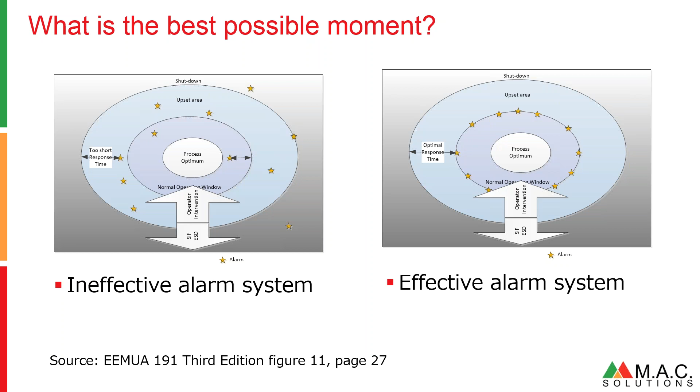So they provide on the same page, in the same figure, the effective alarm system, where all the yellow stars, the alarms, are nicely arranged on the boundary between the normal operating window and the upset area. It looks easy on the picture, but the reality is different.

So let's first take a look at what we can find in the alarm and event logs of the alarm's life cycle. You can probably find an alarm that is annunciated in the alarm and event log. You can probably find the time or the event of the operator acknowledging the alarm, and you can probably find the event where the alarm gets cleared. Typically, there is no trace of operator response in the operator log.

There are some problems with timing. This is what this webinar is about. You can find in the alarm and event log these things: alarms that get annunciated and get cleared. They might be too early or too late. The system has cleared the alarm, probably without any operator action, or it might be that the alarm is fleeting.

Then you have this sequence. The alarm gets annunciated, gets cleared, and gets acknowledged after the clear. What happened? Was the operator busy with something else? Did he perform any action or not? We don't know. Is it a way to make the alarm disappear from the alarm display? This acknowledge thing depends on how your alarm system is organized.

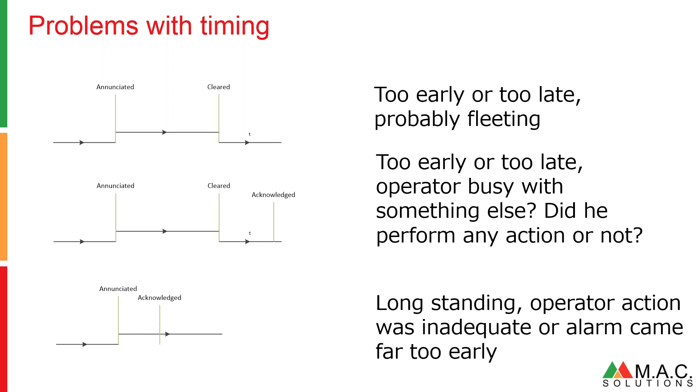And then you can find these alarms that get annunciated, get acknowledged, and have no clear. Typically they are called long-standing alarms. The operator action was either inadequate, or the alarm came far too early, or we don't know. The thing might be a defect. Let's try to fix these problems first.

An alarm and event reporting tool such as the one from Mac Solutions, ProcessVue Analyzer, can guide you in this matter. You can see here in this diagram that about 62% of the alarms are displayed or annunciated less than 12 seconds. You can ask yourself, what can an operator do in less than 12 seconds? Not much, really.

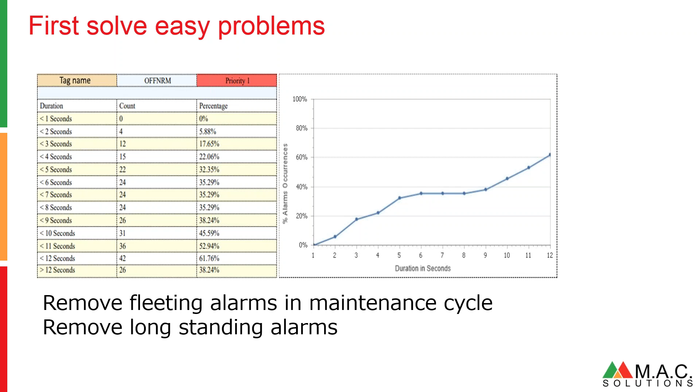So, anyway, these fleeting alarms or alarms with a very short life cycle, they are distractive. And you also need to investigate whether it's an obligation to acknowledge the alarm. In principle, acknowledging means taking responsibility to deal with the alarm, which brings us to the next slide.

Next, you have the operator response delay. The operator should understand what the alarm means. He should think about what to do and not jump to conclusions. We'll have another white paper on that specific subject. He needs to collect all the required information about the situation. He needs to find the right procedure to follow. And he needs to start taking actions or have somebody instructed to perform actions, as to go into the plant and do manual actions.

Then you have the process dead time. The process dead time is the time the process needs before any effect of the operator action becomes imminent. During this time, the operator should be focused to observe the process responding to his actions, no distractions wanted. Then up here, you have the process response to the operator action. The operator still needs to monitor the process variable moving towards the clear line.

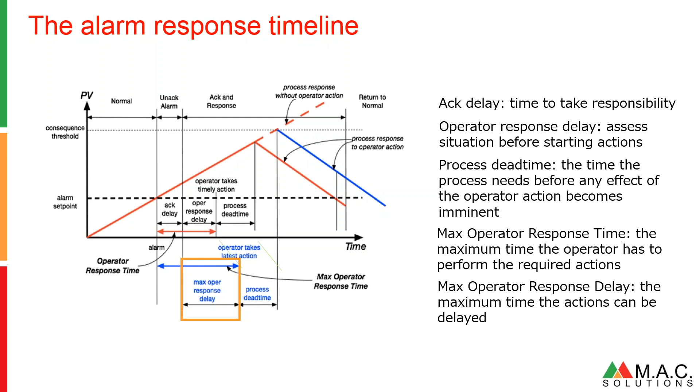I would call it allowable time, the time the operator can wait to acknowledge, for example, because he is away from his desk or he's performing other tasks, such as dealing with another alarm. So, the maximum operator response time is the time between the alarm is annunciated and the consequence threshold minus the process dead time. Mind you that the consequence threshold is very often set by the safety guys, and if it's not set by the safety guys, it's something to be considered during rationalization.

So this maximum operator response time is typically discussed during alarm rationalization based on a number of estimations. Questions to be asked are, can the operator perform all the required actions from his console or desk? Or does somebody need to go into the plant and perform the manual operations? And if that's the case, how big is the distance to get to the right place in the plant to perform these operations? These are all taking time.

The other thing to be taken into consideration is the operator response delay. Can an operator immediately acknowledge the alarm, saying, I'm going to deal with it, or is he still performing another task, just like dealing with another alarm? And another question to be asked, and that's something I'll come back to in one of the next slides, is the operator allowed to be away from his console or his desk?

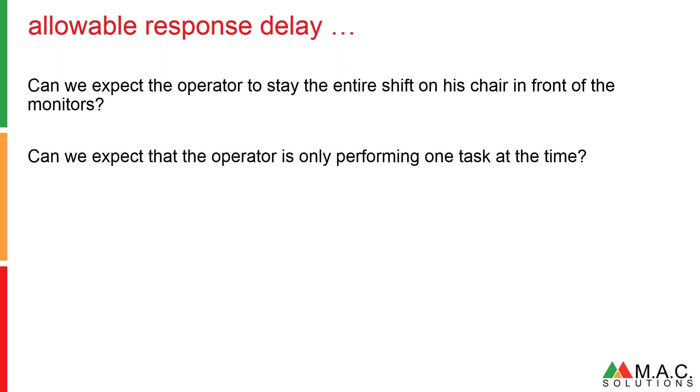So we discussed allowable response delay. We need to take the following into consideration. Can we expect the operator to stay the entire shift on the chair in front of the monitors? I don't think so. Can we expect that the operator is only performing one task at a time? I don't think so either. How are you going to manage this? This is not an engineering issue. This is an organizational issue.

So, taking the previous rule, you can argue that the acknowledge delay plus the maximum operator response delay should be smaller than the time the consequence threshold is reached, minus the process dead time, minus the time required to perform the actions. I would say the acknowledge delay plus the operator response delay is the allowable response delay.

Let's take some examples. Let's say we allow the operator to deal with another task during 10 minutes, or we allow the operator to be away from his desk for 10 minutes, or we have estimated that whatever he's doing might take another 10 minutes before he can adequately take responsibility to deal with the alarm. If you allow that, then this has an impact on your alarm system. Because any possible alarm which requires an operator response in less than 10 minutes should be avoided. Or the operator action should be automated.

Meaning that if you find in rationalization such an alarm where the operator response delay is less than 10 minutes, you have to look into, well, when you automate the operator action, then you can decommission or downgrade the alarm to something else. And don't forget to document why you have done this. The other option is to establish a new alarm with enough response time.

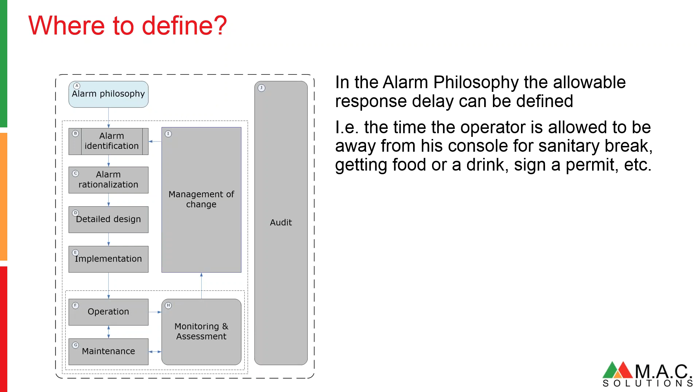It's also the time the operator has available to finish or complete another task before responding to the alarm. They should be aware of that. We'll come back to this later. It's also an organizational matter. Basically, if you set up your alarm system in the right way, then you will ask your operator to only acknowledge the alarm when he's capable of starting to assess the situation and perform the required actions. Right?

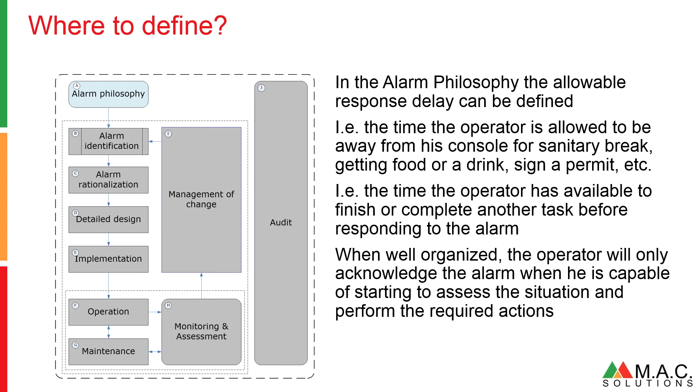This has some consequences. I think nice buttons like a page acknowledge and so on should be avoided. Also, it should be avoided that people just acknowledge the alarms and do nothing. Like I said, it's an organizational issue, and plant management and human resources should be aware of it because it can come up in discussions.

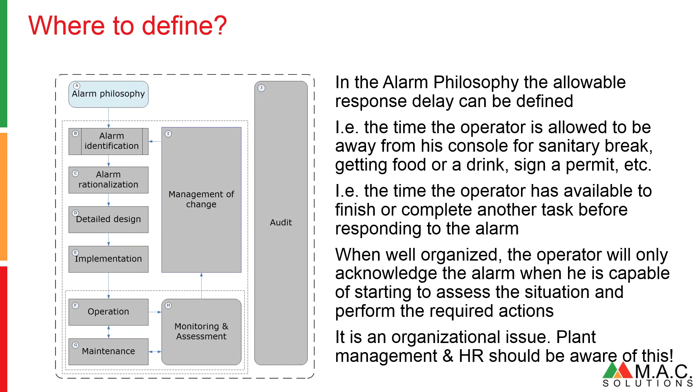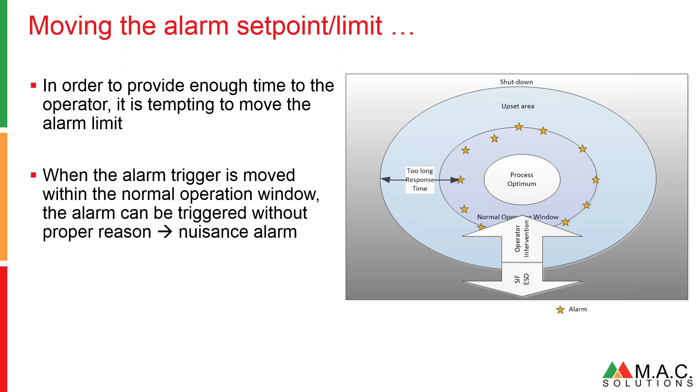So we want to allow the operator more time to respond to an alarm. So it's very tempting to move the alarm limit, right? So if you start moving the alarm limit, like illustrated in this figure, then there is a chance that you move the alarm threshold into the normal operating window. If you have your alarm limit in the normal operating window, the alarm can be triggered without a proper reason and becomes a nuisance alarm, and then we need to get rid of that.

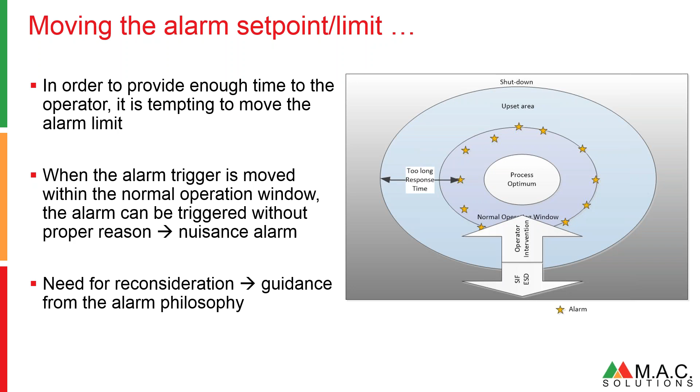So if you need more time and you want to avoid that it's a nuisance alarm, you need to reconsider your alarm limit. And you will probably find some guidance from your alarm philosophy. If there is no guidance, the alarm philosophy should be reviewed.

So what is a potential method to set the alarm threshold at the right place? You have to define the consequence threshold if that is not already defined for you by the safety guys, by the quality guys, or by the authorities. To avoid spills and releases of dangerous substances.

Knowledgeable people in operations should estimate the time required to perform the actions. You should estimate or measure the process dead time for that particular situation. And then on top of that, you add the allowable response delay, and then you see where you have to put the alarm threshold.

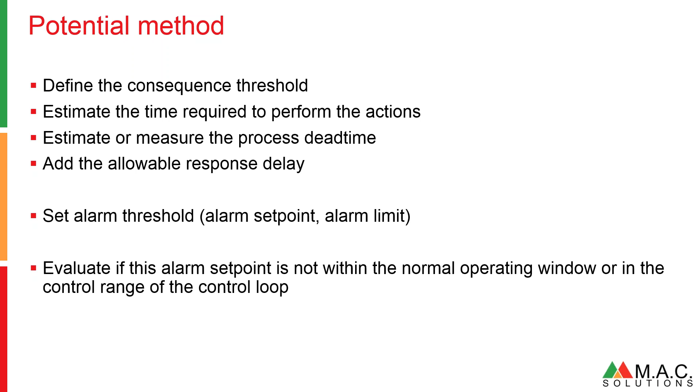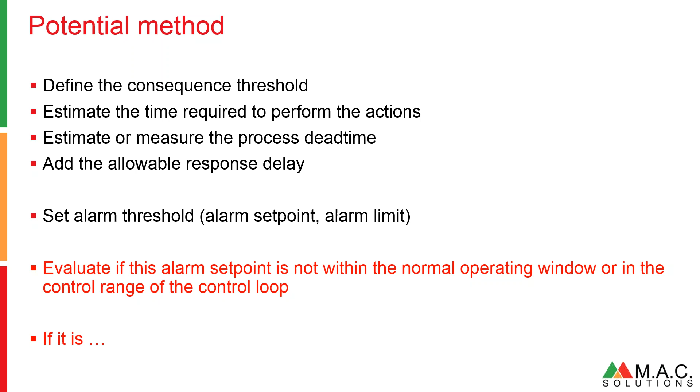The next thing you need to do during rationalization is to evaluate if this alarm set point, alarm threshold, is not within the normal operating window or in the control range of the control loop. And if it is, then it's time to apply advanced logic. So advanced logic is needed when an alarm limit on a single measured value, a single process value alone, cannot provide enough time to respond to the alarm.

What can you do? You can combine, for instance, other parameters from the same process variable from the same control loop, like the rate of change or the direction of change. You can combine process and equipment conditions, such as are we in startup or shutdown, are we heating or cooling. These conditions are also used to suppress alarms during certain states. You can also use them just to annunciate the alarm in particular states because you know that this is not the normal operating window.

You could also combine with this alarm set point the configuration and status of the control loop. Is the control loop in manual? Is it automatic? Is it cascade? Is it advanced control? What have you. And for batch processes, you can also take into account the recipe state.

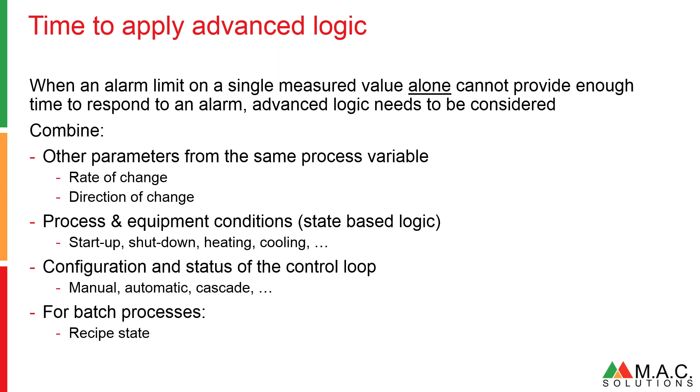More advanced logic. If a single process value and the parameters of that control loop are not capable of indicating the abnormal situation you want the operator to avoid, then you might need to combine different process variables. So what can you do?

You can investigate the alarm and event log for sequence of events leading up to the abnormal situation. This is like a manual search in the alarm and event log. Some tools, like the reporting tool from ProcessVue, can help you in such a search. You could use pattern mining techniques to find such sequences.

You can apply data mining techniques to the process historian to predict the abnormal situation and/or to find the right contributing variables to that abnormal situation you want to avoid. Note that in such a case you should have such an abnormal situation in your alarm historian.

Another thing you can do is to use your simulation model of your plant, which you might use for operator training purposes, and have that run a little bit ahead in time. For instance, you start it every 15 minutes or every 10 minutes and you let it run 30 minutes ahead in time. So if then that simulation hits one of the alarm thresholds, you can say, okay, I have something now that is predicted, and so we have more time to respond.

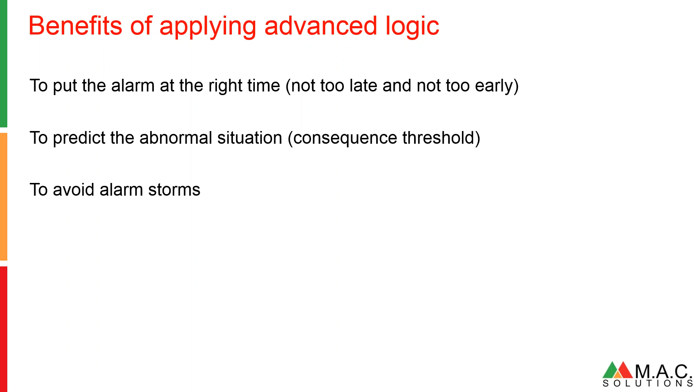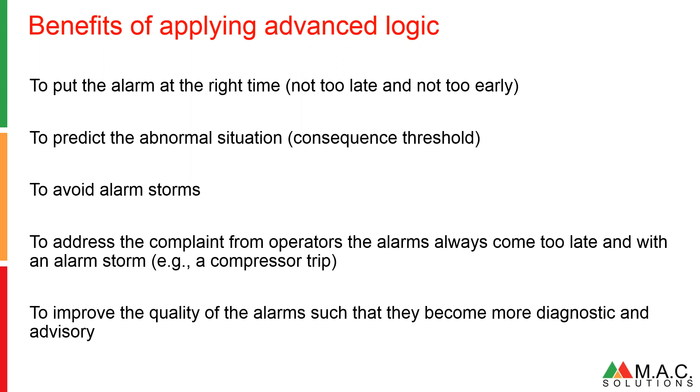If you can avoid that abnormal situation, if you can avoid a trip, like a compressor trip, you also avoid alarm storms. And you address the complaint from the operators that the alarms always come too late, and they come with an alarm storm. Compressor has tripped, and then you get a bunch of other alarms as a result of that trip. And the side effect is that you improve the quality of the alarms such that they become more diagnostic and advisory.

Now, if you want to implement this, the IEC 62682 standard suggests that you shall train the operator. It's an obligation. So first of all, you need to train the operators to understand the alarm philosophy if you have put the concept of allowable time and advanced logic in your alarm philosophy. You should train the operators to understand any advanced logic when it is applied. And the operators should understand that such logic is to their benefit.

It is suggested by EEMUA 191 that such logic should be presented in a graphical way and not in programming code of any kind, in order that the operator understands the logic that is applied to generate the alarm. Eventually, if your HMI allows it, you should make perhaps a help function in your alarm such that the operator can view the logic that has triggered the alarm. But that's a general recommendation. That's a bit outside the scope of this webinar.

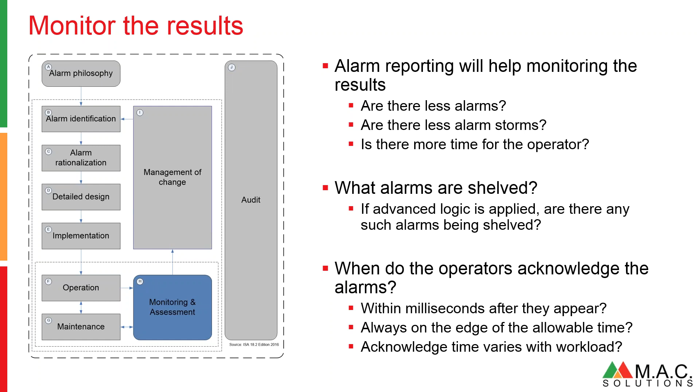So, next to monitoring and assessing with a tool, which is something you can run in the background and report automatically every week, every 2 weeks or every month, there is, as proposed by the standards, the audit process. The audit process verifies the perception of the operator. So the audit process must include operator interviews, and one of the questions to be asked is, are the alarms now coming on time? To the perception of the operators, are they on time or are they not on time?

Is the applied logic working or is it becoming a nuisance? Do you have enough allowable time? It might be that you start off with an allowable time away from your desk of 5 minutes, and the operators say, okay, that's an enormous improvement, but they are assigned other tasks to do, and they say, well, we don't have enough time anymore, so we need more allowable time.

In that case, you need to update the alarm philosophy, and you can say, okay, we're going to introduce more or less allowable time, or we're going to allow more or less advanced logic in our design of our alarms.

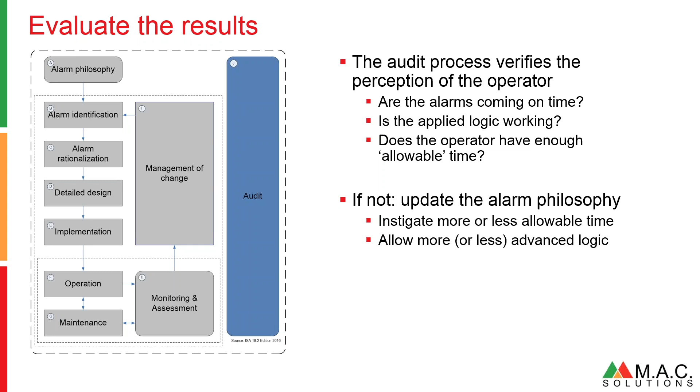This brings me to conclusions. The alarm philosophy is the place to define the allowable operator response delay, or the maximum ack delay, depending on how you call it in your alarm philosophy. Good timing requires a consensus in the alarm philosophy on an acknowledgement strategy. Think about: acknowledge only if you as an operator are going to do something about the situation being alarmed; no longer acknowledge after the alarm is cleared, removing the page acknowledge button from the alarm display.

Good timing requires also consensus in the alarm philosophy to apply advanced logic or not. Good timing requires a rationalization process which provides figures or estimates in process dead time, and a rationalization process which discusses and estimates the time to perform the actions and to assess the alarm situation. Good timing requires a design process that is capable of testing and validating the advanced logic, and an implementation process that includes the operators and trains the operators in this new way of predictive alarming.

Good timing requires a monitoring and assessment process and tools that are capable of measuring the acknowledgements and the clear times. Mind you, most of the alarm logs do not contain operator actions, because an operator action can be a telephone call or a manual operation which you have no trace of in the alarm event log. Finally, good timing requires an audit process that provides required feedback from operations.